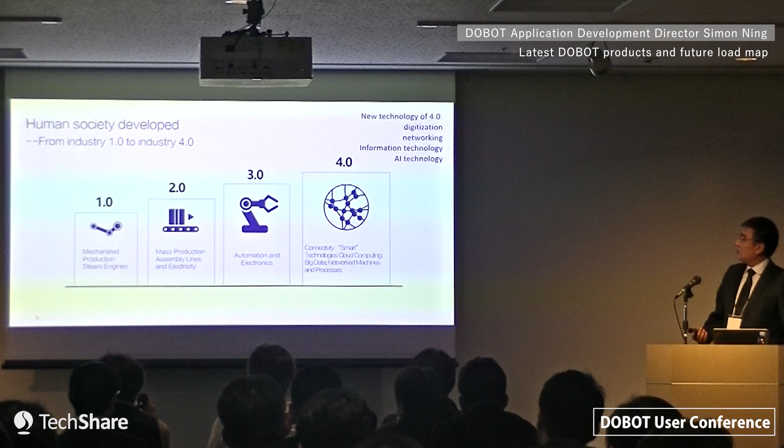We know that development of industry goes from mechanized production, to mass production, to automatic production. Now we are in Industry 4.0, where digitalization, networking, information, and AI technology bring us to a new industry century. The robot is the kernel part of Industry 4.0 smart manufacturing.

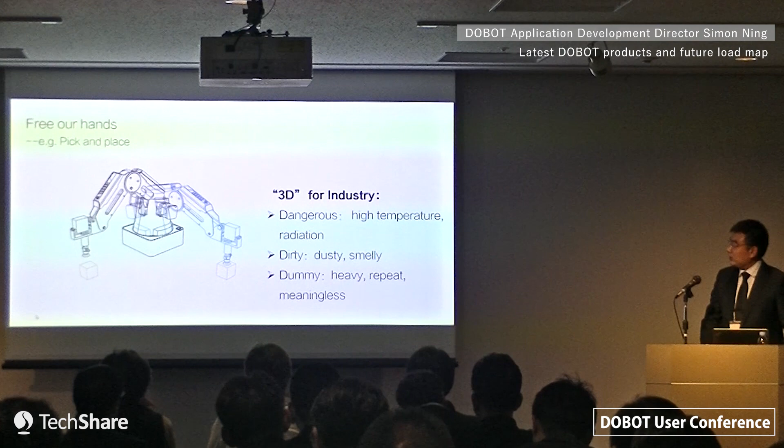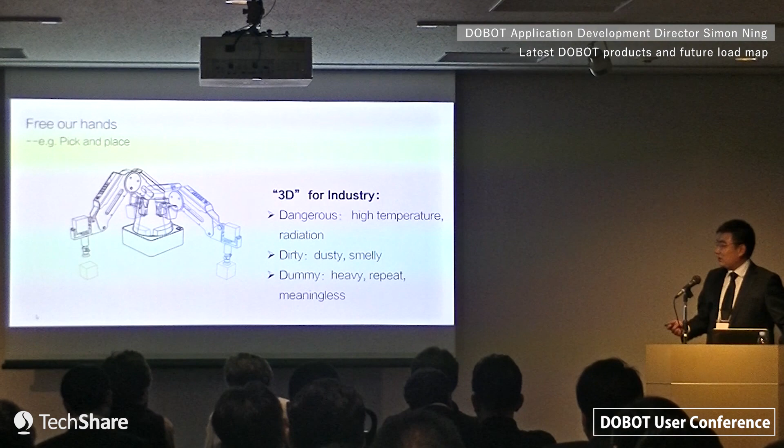Robot is a comprehensive engineering technology. It contains mechanical, electrical, and computer science, and others. Robots can do a lot of work for human beings, especially in 3D industry work: dangerous, for example high temperature or radiation environments harmful to our body; dirty, meaning dusty and smelly; and dummy, meaning heavy, repetitive, and meaningless work. This work should be done by robots instead of humans.

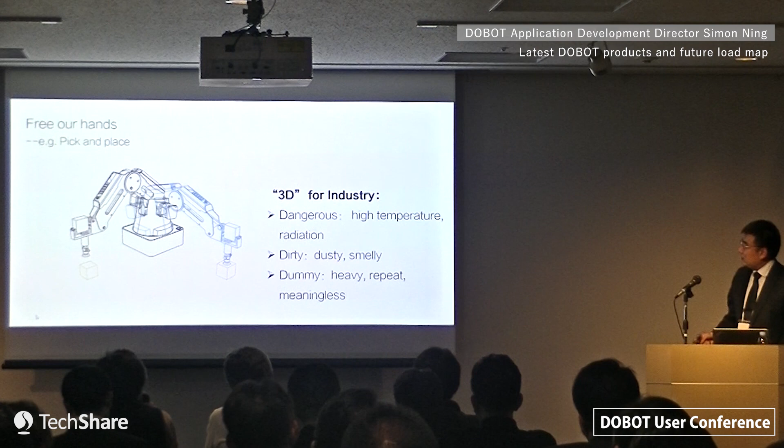So how does it free our hands? Like the action of picking up something, moving it to a target position, then dropping it down. How to achieve this? How can you use electrical components and metal structure to realize that?

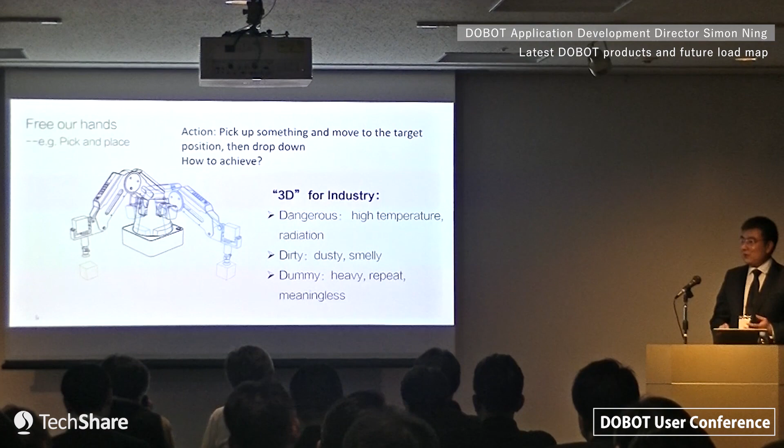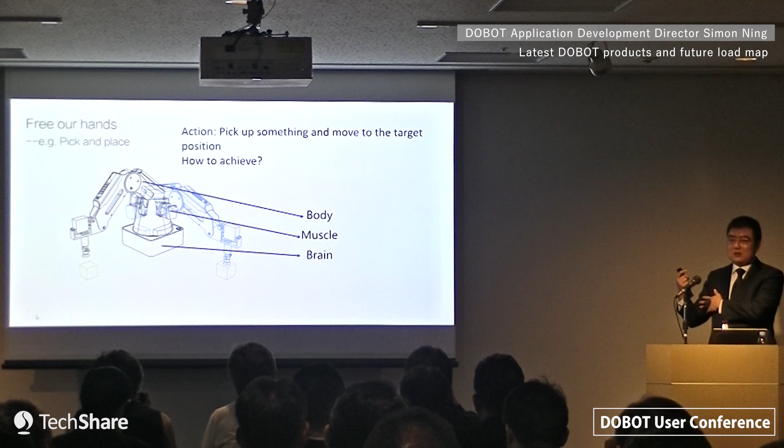It must be like human beings, having a structure like us with bone, muscle, and brain. At first, the robot must have a body described by the Denavit-Hartenberg notation. In this notation we can get information about the robot, how long the rods are, and how the rods join together.

The computer will know the information of the body and can calculate. After the robot has the bone, it must have muscle to supply some dynamics. Usually the dynamic comes from step motors, servo motors, and AC motors.

Drivers receive the signal from the controller and calculate the current to the motor to rotate to the target position. The performance of the movement relies on the design of the driver loops.

In the end, the robot system must have a brain, composed of hardware and software. Hardware gets feedback, like from an encoder and so on, from the body, and calculates the position we want. Because the brain of the robot knows the structure of the body, it can calculate where the motor should rotate to, and plan the path.

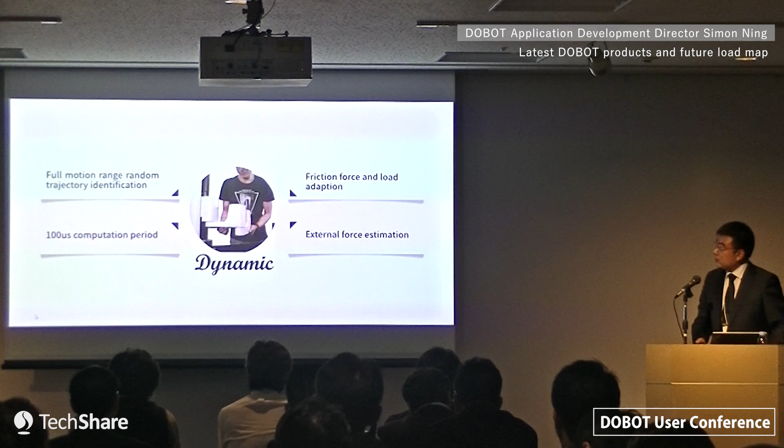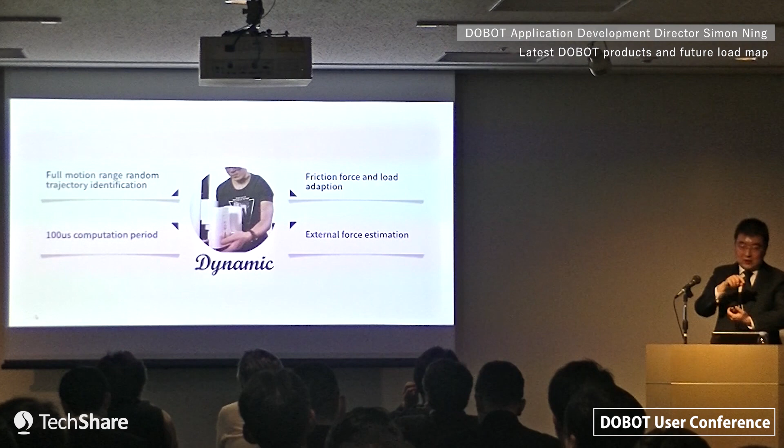Furthermore, the robot can calculate the friction force and adapt the load automatically. You can drag it easily. After that, the computation period is about 100 microseconds, and it can estimate the external force. That's helpful to improve the experience of drag teaching. You can set the point by dragging it, instead of using the demonstrator to go up and down to remember the point.

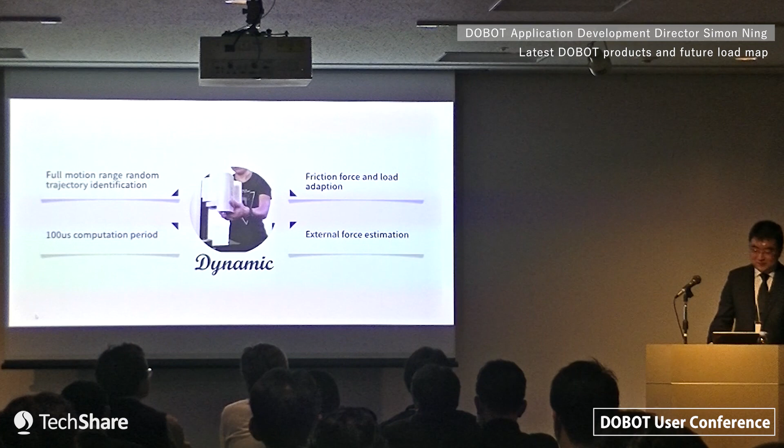Another difference is the open architecture of DOBOT compared with a normal arm. Usually you teach a robot with a teaching box, and you have to use it. If you want to develop something on this platform otherwise, you can't—it can't receive commands from your applications. But we support many APIs for this platform, like LabVIEW, MATLAB, Robot Operating System, Arduino, Python, and Java. So you can develop interesting applications for play, trace, and so on, calling the API directly. Controlling the DOBOT robot arm is different from a normal industrial arm.

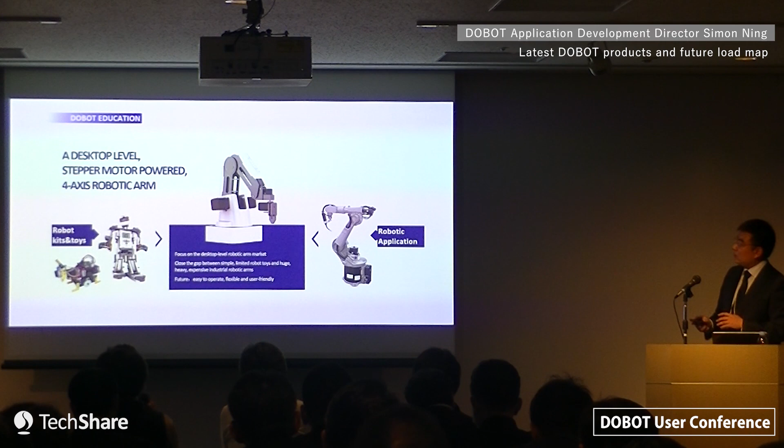Okay, roadmap. Now, DOBOT Magician is mostly used for education, as a bridge between kids and real robot applications. Customers use it to learn about robotics, computer science, structure, mathematics, programming, and drivers. We developed a series of products like a 3D printing kit, conveyor belt, linear rail, Arduino kit, and mobile platform, which are helpful for learning and using robotics.

This is a little demo.

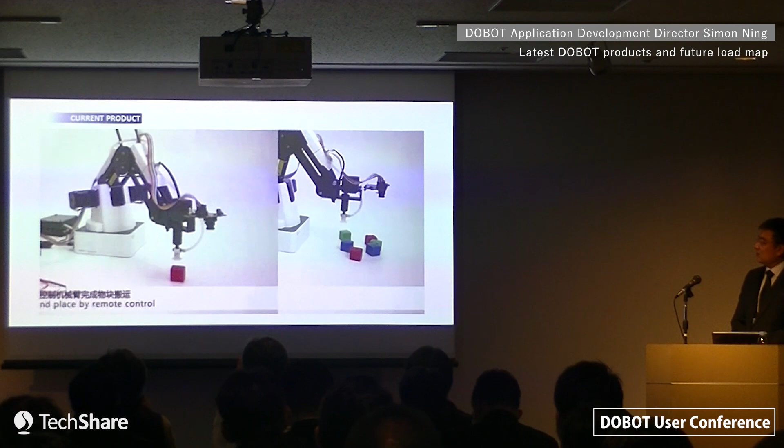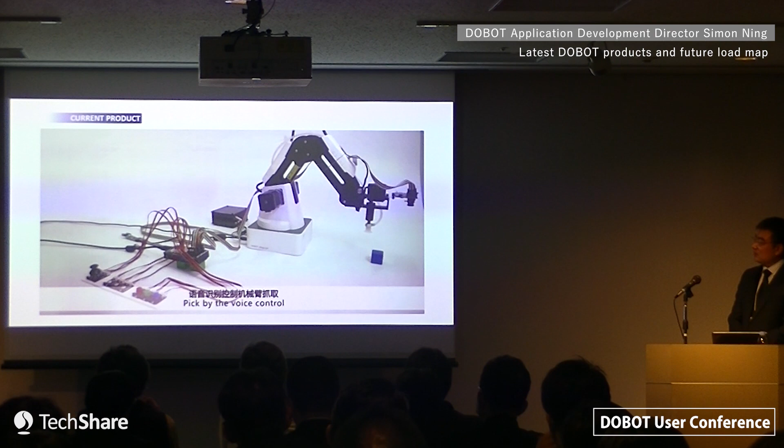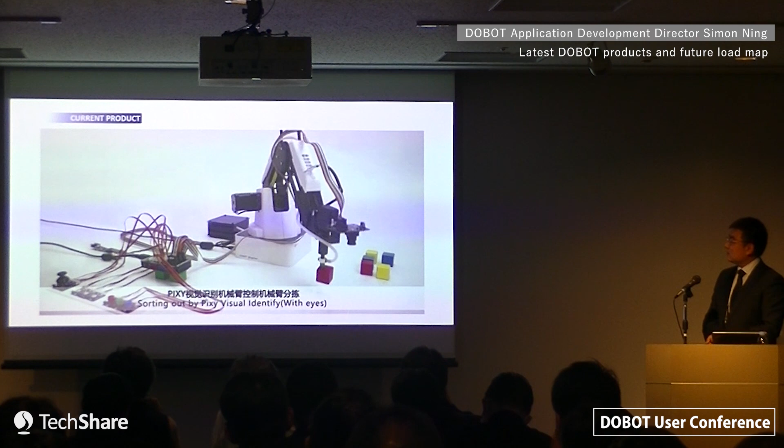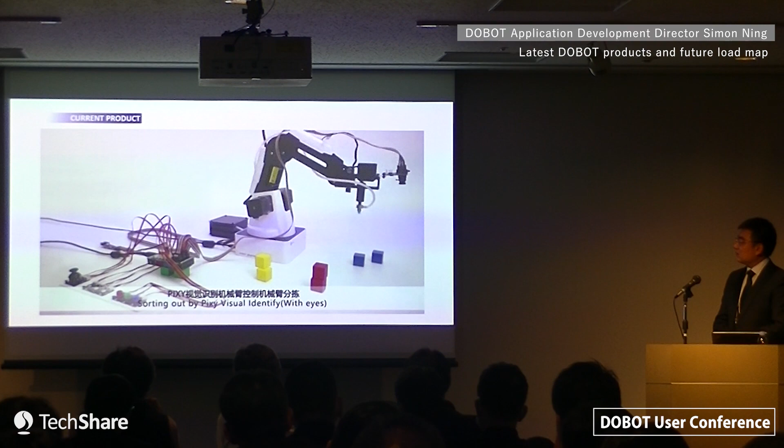You can control the robot arm like playing PlayStation. It's very interesting for learning to program.

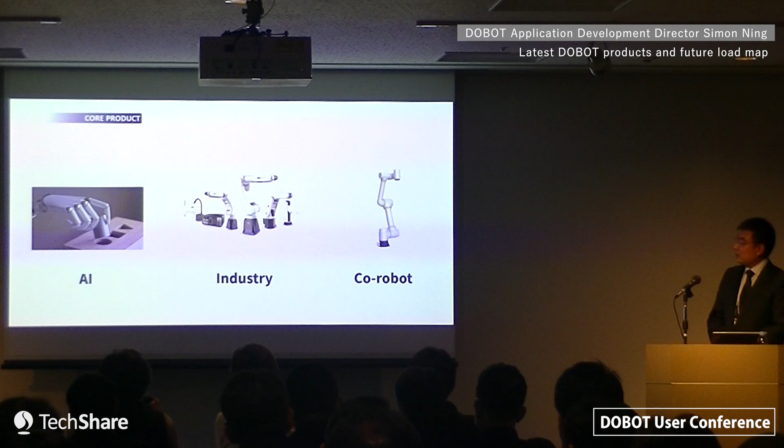In the research field we have three directions: AI intelligence, industrial arm, and co-robot. First is AI—this picture is cut from our software, showing the point cloud of bottles mixed in a box. We developed research to find the 3D target, and the robot calculates the path automatically to catch the target, finding the flat surface to pick it up.

After that, we embedded the vision system, so now you can connect the camera to the controller directly. The robot system executes the digital image processing—you don't need another PC as usual. You can connect the camera directly to the robotic system, saving a computer.

We also supply some APIs for Python, since we know a lot of AI is based on Python. There's much interesting usage on this platform, like ASR and word analysis—for example, 'go and get my newspaper' will be separated into keywords. That's what ASR does, and it's very interesting.

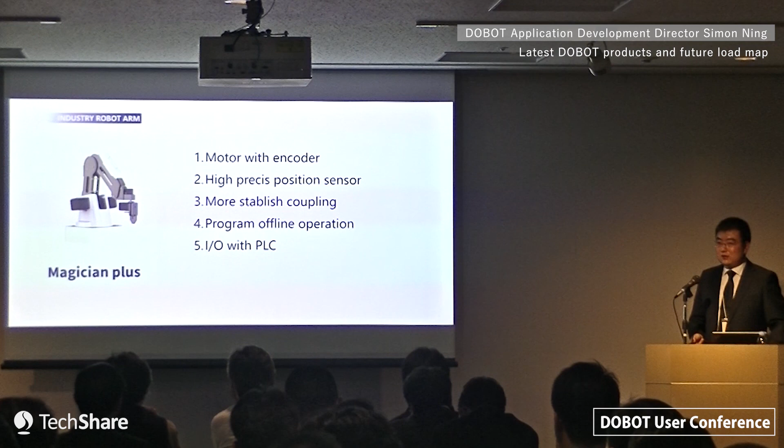Above was about AI, now industrial arm. We are planning to improve our Magician Plus, using a motor with closed loop, high precision position sensor, and more stable coupling, to improve precision and stability. For software, we'll make it easier to operate, with offline programming and I/O with PLC.

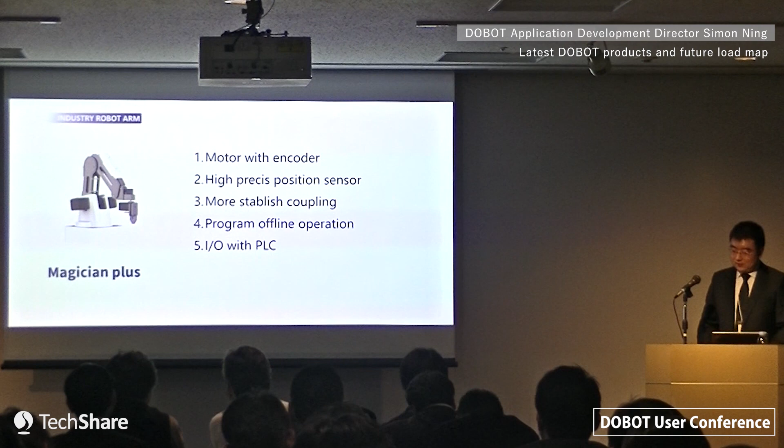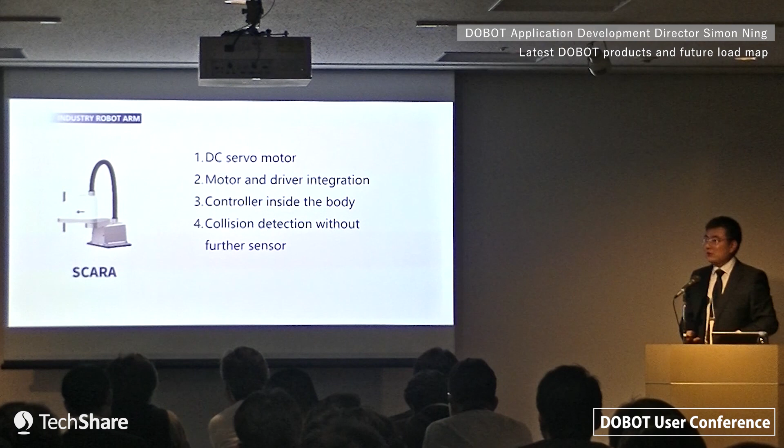Next, the SCARA arm uses a DC servo motor, with the motor and driver integrated in the rods, and the controller is compact—you don't need a big electrical box anymore, just this. It's a straightforward 6-degree-of-freedom arm. What we did was reduce the count of AC drivers, since the driver is a major cost. Several motors are served by one driver, so we can reduce the cost.

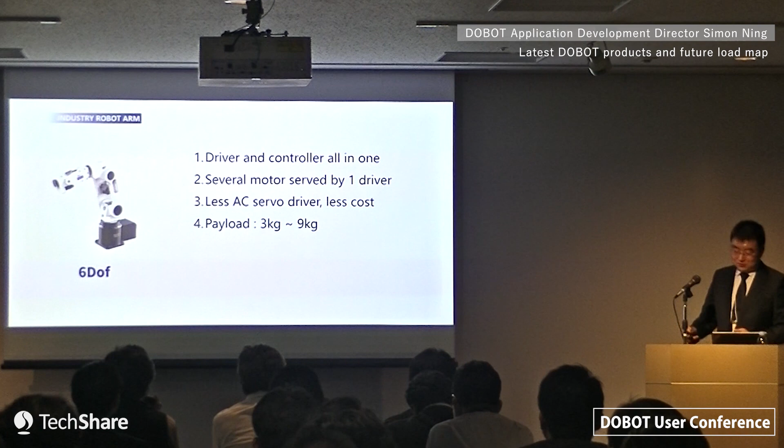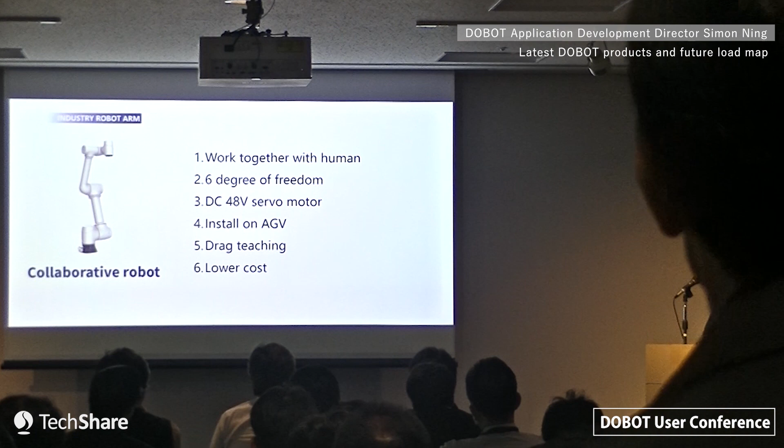After that, collaborative robot—this is a new thing. Like M1, it uses a DC motor and can work together with humans, supporting drag teaching: you can drag it here, it remembers, then the next point. You don't need to use a teaching box. It uses a DC driver, so it can be installed on an AGV.

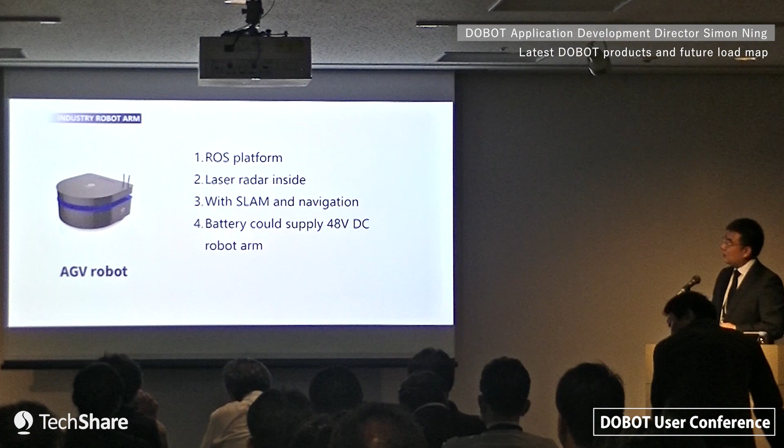What's an AGV? This is our newcomer, developed on the ROS platform with a laser radar inside, SLAM and navigation built in. Its battery supplies 48 volts DC, so it can support a robot arm. Let's see a little video.

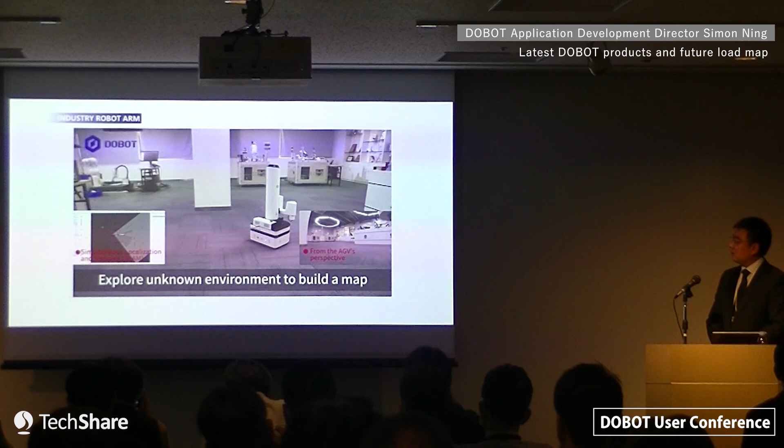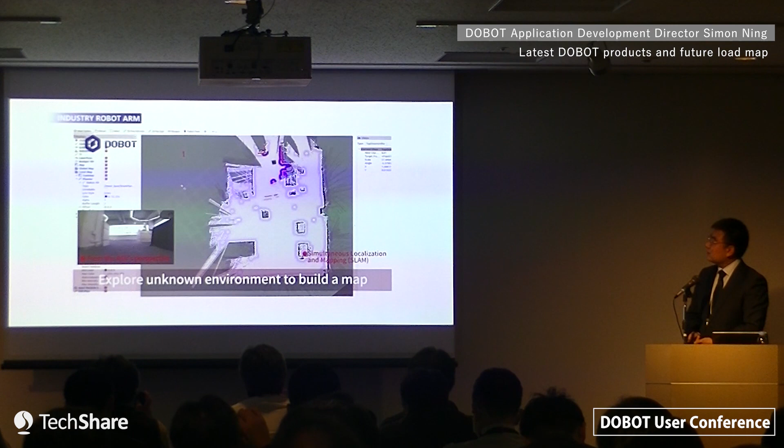It can explore an unknown environment to build a map automatically—it's building the map now, learning where the wall is and where obstacles are. Now the map is okay, this is the robot.

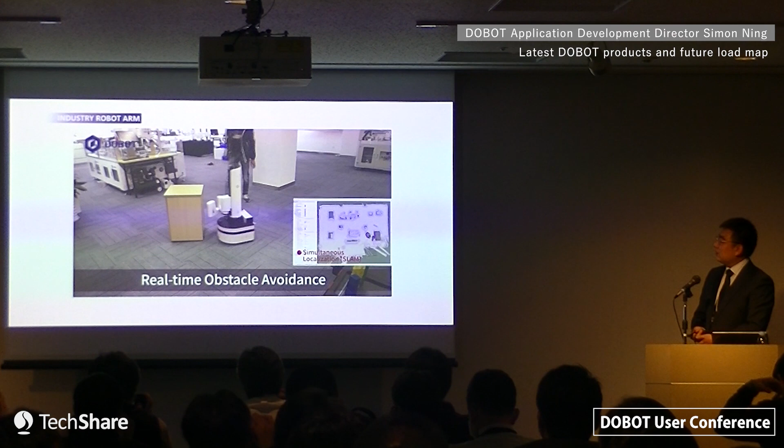You can send a command like this—this is the path planning, and it performs real-time obstacle avoidance. You can stand here and put something in front of it, and it will avoid it and plan another way. This is a real-time map.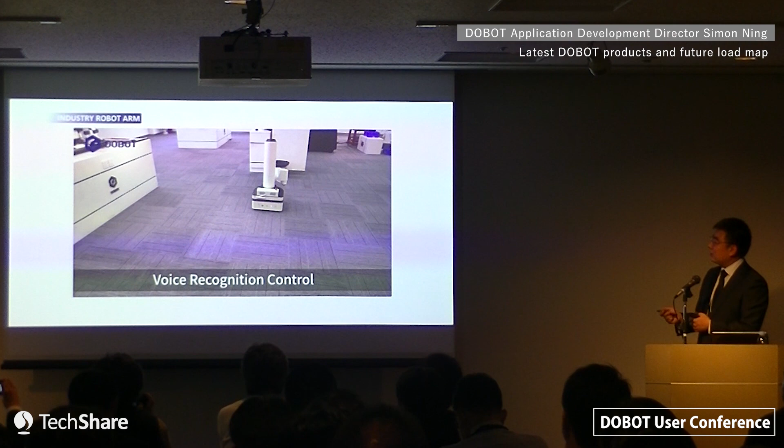We added an ear to it, so it can recognize voice commands. He said 'turn left,' he said 'stop,' then 'turn right,' and goes back.

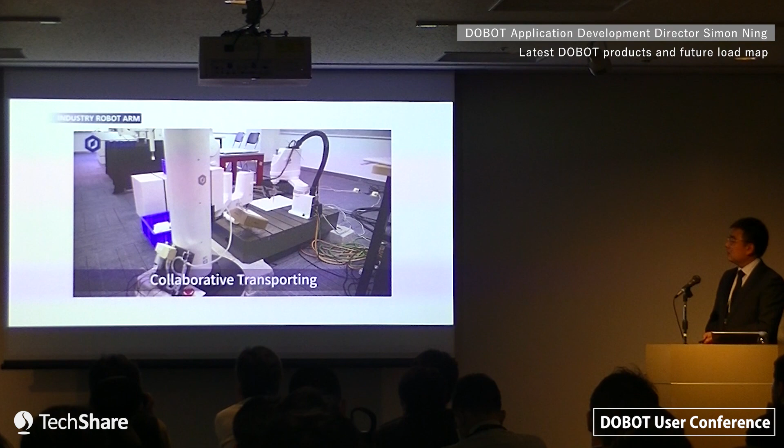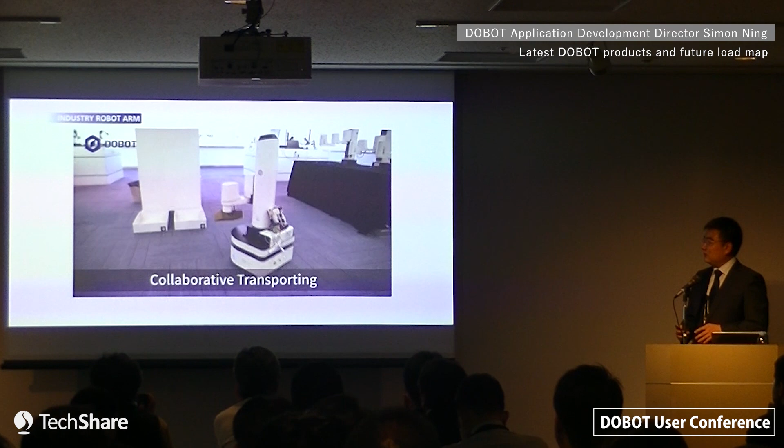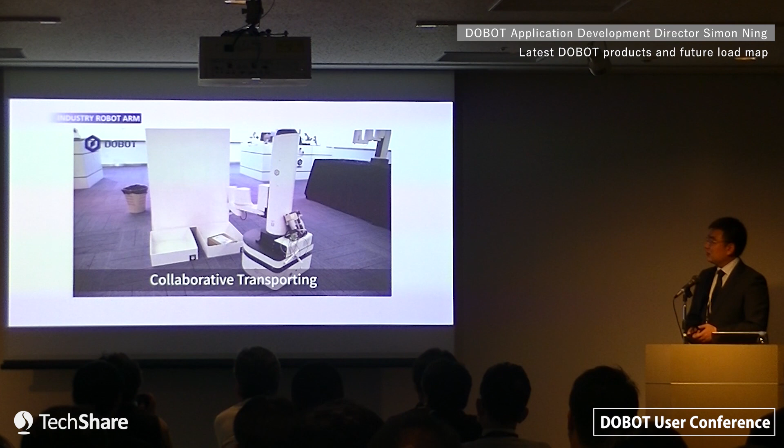Now it can help transport things, and you don't need a belt or a rail. Yes, the robot arm has a leg. These are the advantages of the DOBOT lightweight robot.

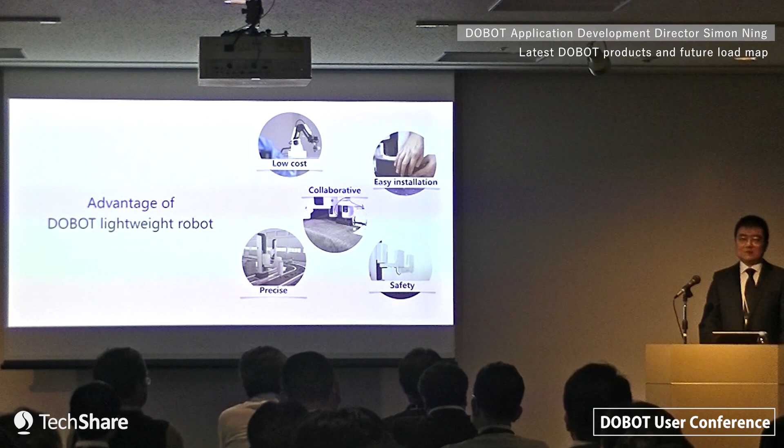These are the advantages: low cost, easier installation, collaborative, high precision, and especially safety—it will stop at once if it knocks into something.